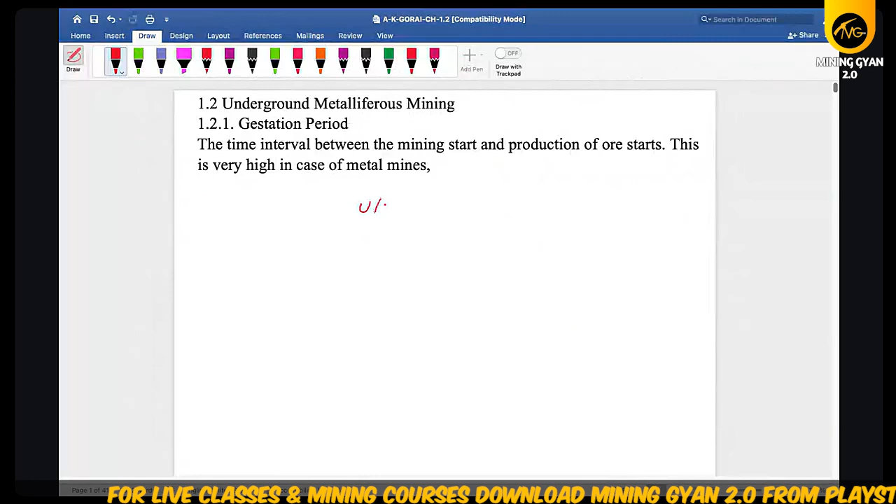Today we will start chapter 1.1, 1.2. We have seen the UG coal mines, and today we will start metal UG. I have decided to give you basic information of the method because maybe you have not read metal thoroughly.

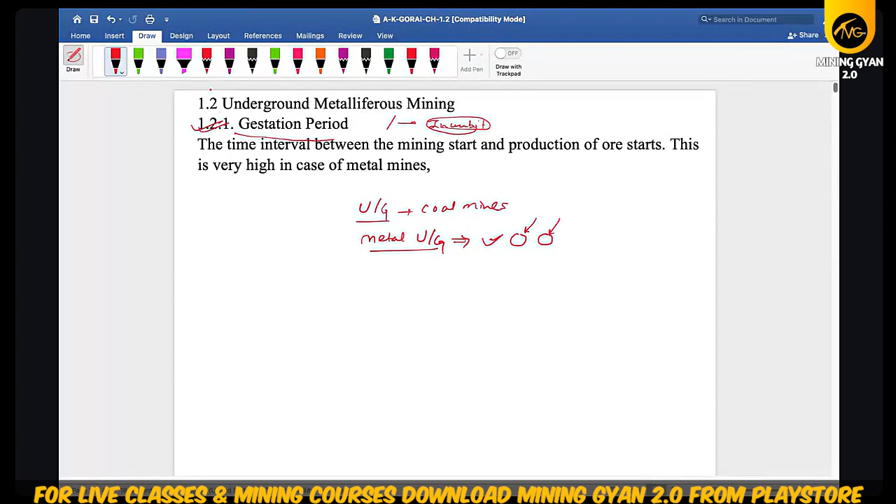Let's start. So the first terminology is gestation period. In the coal mines we have seen incubation period; here we will see gestation period. What is the gestation period? Gestation period means the interval between the mine starting and the production of the ore starting.

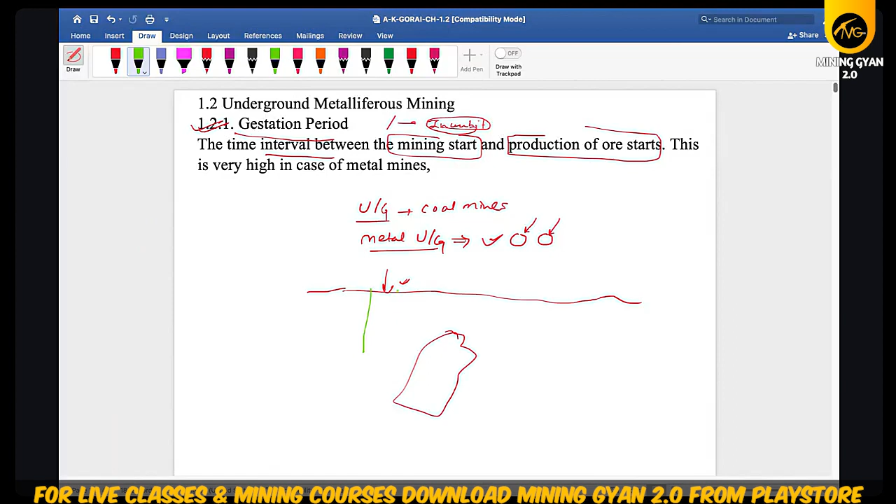What does it mean? Suppose this is the surface and this is your ore. On the first day when you start your mining, you will not get ore because you have to make the shaft, levels, cross cuts, and many other things. Then one day will come, after 2 months, 1 year, 2 years, or 5 years, when the ore production will start and you will reach the ore. So this gap is known as the gestation period.

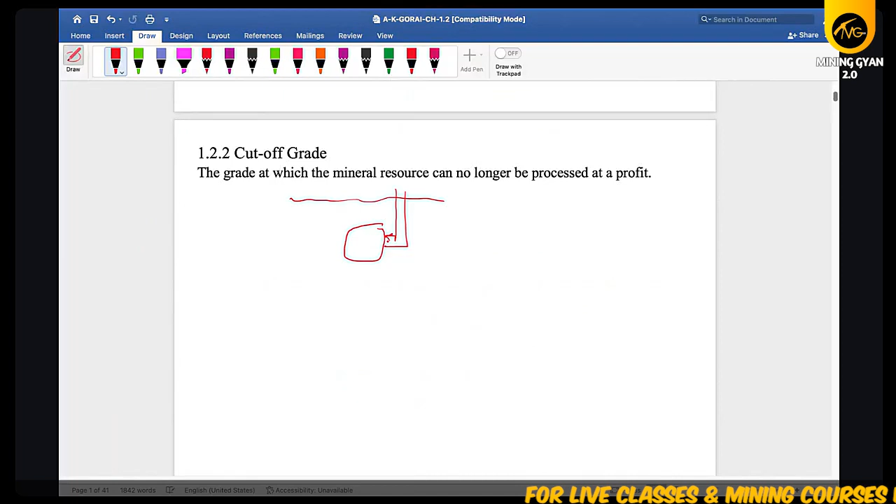Cutoff grade: cutoff grade means the grade at which the mineral resources can no longer be processed at a profit. That means if you want to extract this ore, it should be economical — the grade at which the mineral resources can no longer be processed at a profit. If profit is not happening or is almost finished at that grade, we call it the cutoff grade.

Break-even cutoff grade. The break-even cutoff grade is defined as the grade for which the net value is zero.

Now let's come to the terminology with a figure, so I will give you the hint and explain it thoroughly. In this figure, this is your shaft, this is your incline. Suppose this is the outcrop of your ore, and this is your surface.

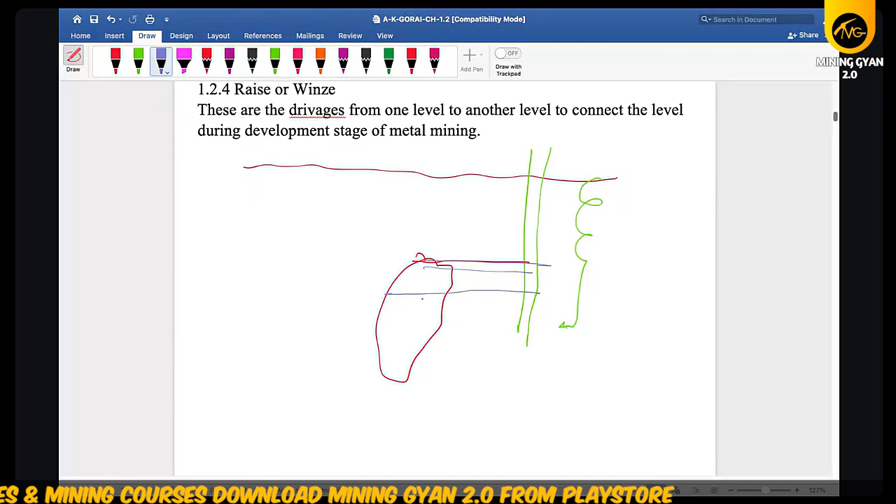So to excavate this ore, we have to make a shaft or incline, whatever method they are using. From this shaft you have to create levels, and this is your cross cut. This is your shaft.

Let me change the color. The strata above the ore body, resting on top of the ore body, is known as the hanging wall. The strata on which the ore body is resting is known as the footwall. So if the ore body has strata above it, that is the hanging wall, and the strata below the ore body is the footwall.

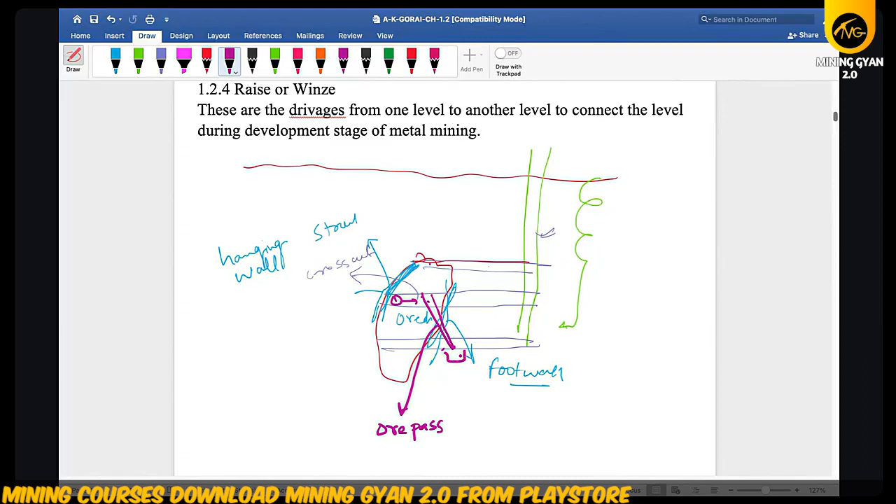Suppose you want to connect this cross cut — if you extract ore from here and put it down, then this connecting passage is known as the ore pass. So here an ore bin will be made which will connect to your shaft.

Till now we know this, and we will divide our ore body into stopes. Suppose this is your one stope.

If you go from down to top, it is known as a raise, and if you go from top to down, it is known as a winze. So the raise and winze are the drivages from one level to another level, connecting the levels during the development stage of the metal mine. Raise means down to top, and winze means top to down.

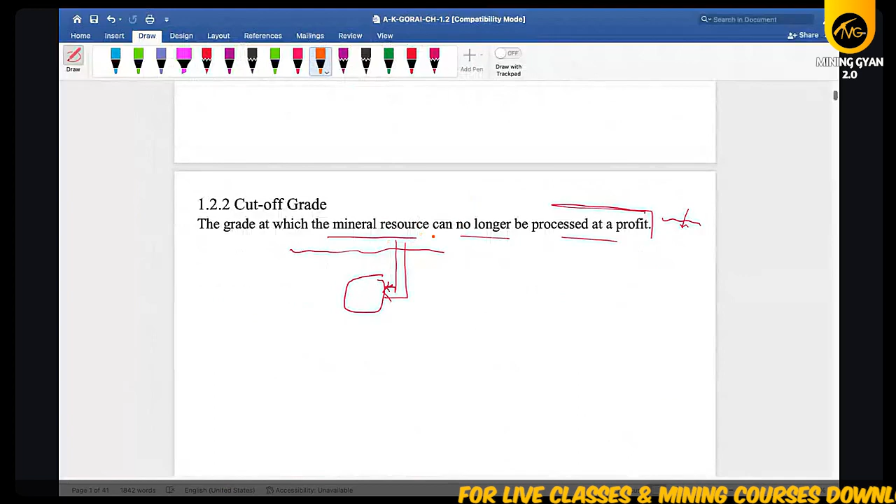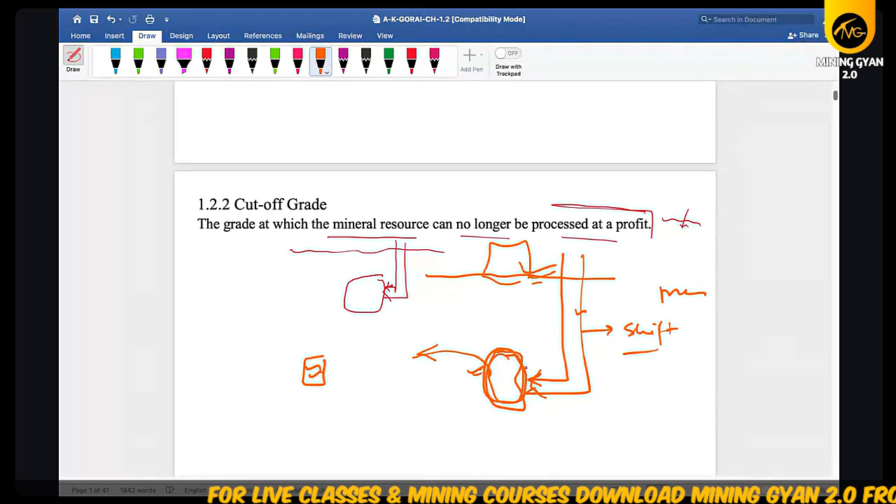The grade at which the mineral resources can no longer be processed at profit. Suppose this is your mineral, so when you extract it, a lot of cost will be involved in it, such as shaft making - you will need money for the shaft, manpower, and many infrastructure facilities you have to create. So if that cost and the value of the ore which you have extracted are nearly equal, then it is the cut-off grade - meaning you are not profitable, but it is equal, then it is the cut-off grade.

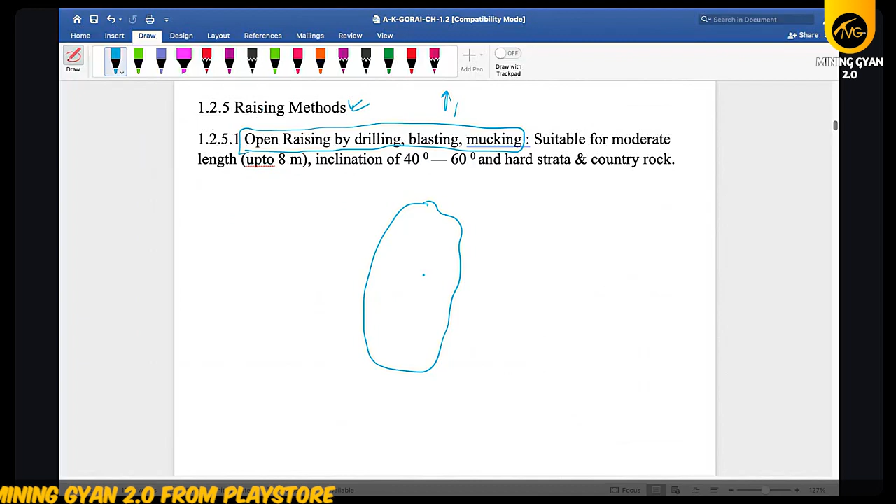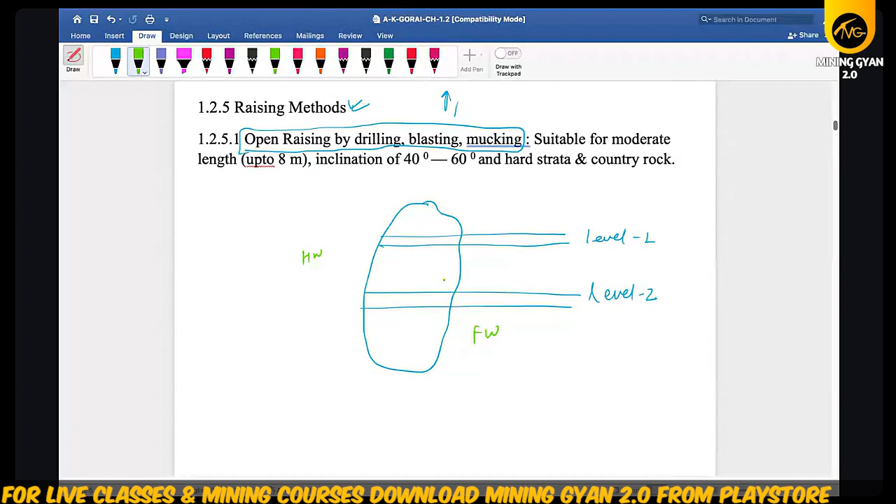So in the raising method, suppose this is your ore, okay, and this is your level 1, and this is your level 2. Okay, so this is your hanging wall and this is your foot wall. So in this method you will create - first we have to see applicability, meaning where it is used, then we will discuss the method.

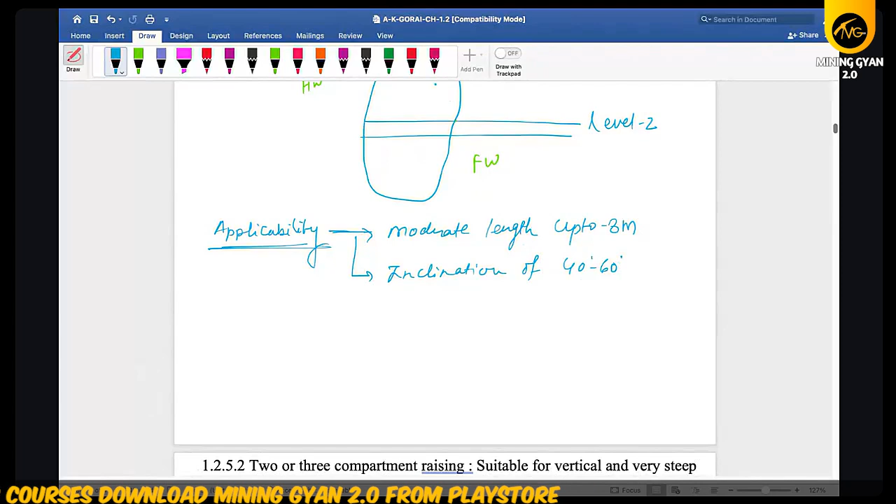Applicability - where we will use it. First, the ore should be of moderate length, up to 8 meters. Second point is inclination of the ore body should be 40 to 60 degrees, slightly inclined. And third point, hard strata - the strata should be hard. So this is the applicability of it.

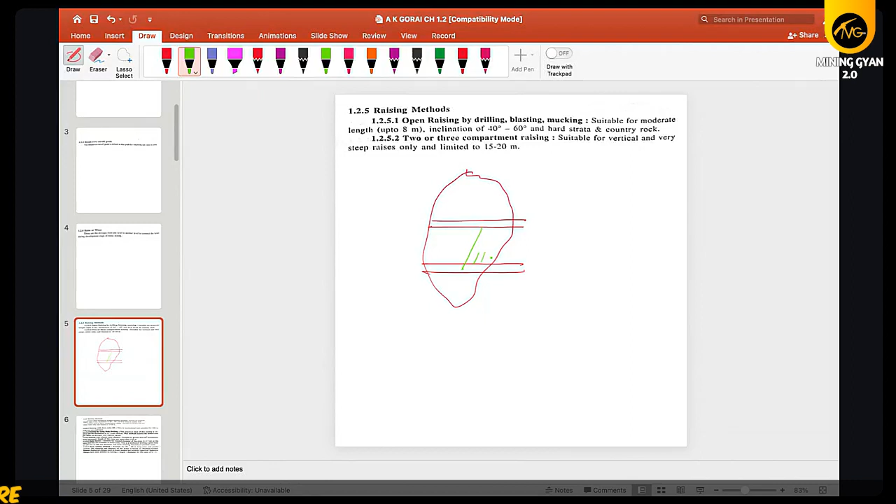So in this method what we will do - suppose we want to excavate it, so we will drill 1, 2, 3, 4, okay, and we will blast it. We will blast up to this point, so this will blast and the ore will fall down. We will collect this material from here. Then we will drill, make a compartment, or extend - where is the eraser gone. So where we were, we will hole and this material will be pulled down, so we will collect it. Again we will make a platform and drill this one and blast and collect. This method is known as open raising by drilling, blasting and mucking.

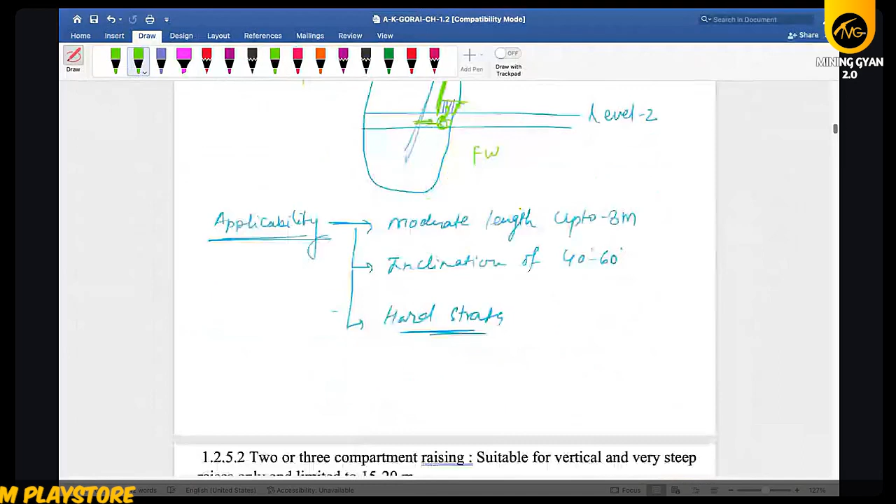So in this method, what type of problems will we face? What is the disadvantage of this method? Because in this method, the disadvantage - first, lack of ventilation. Why? Because we are drilling from bottom to top, so in this area the ventilation was not equipped - ventilation is not up to the mark.

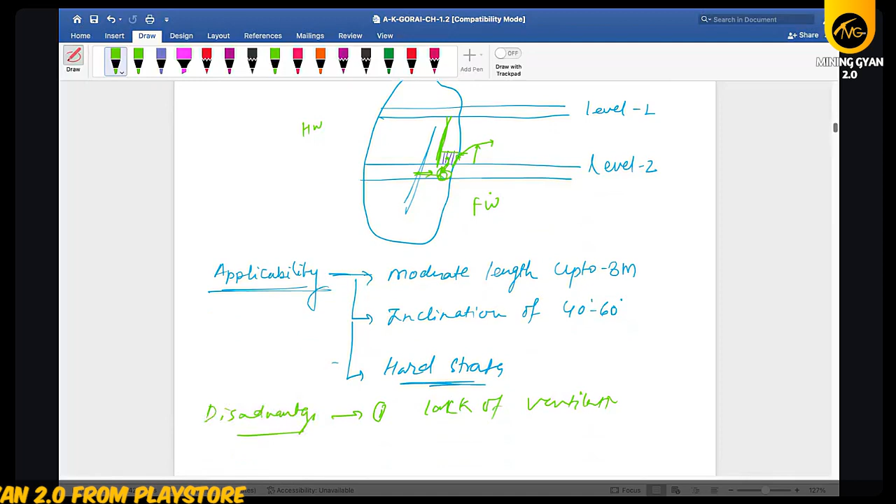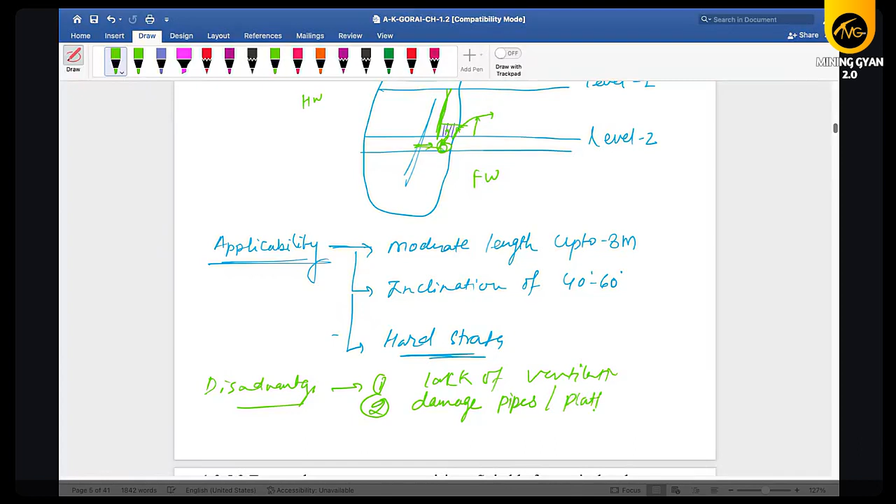Second point, whenever you drill this area and it falls down, whenever this ore falls down, it will blast or create damage to your pipes and platforms. And the third point of disadvantage - should I write or will you write yourself? So second point is damage to pipes and platforms during the blasting. Third point, when the raise goes higher, as we reach very much higher up,

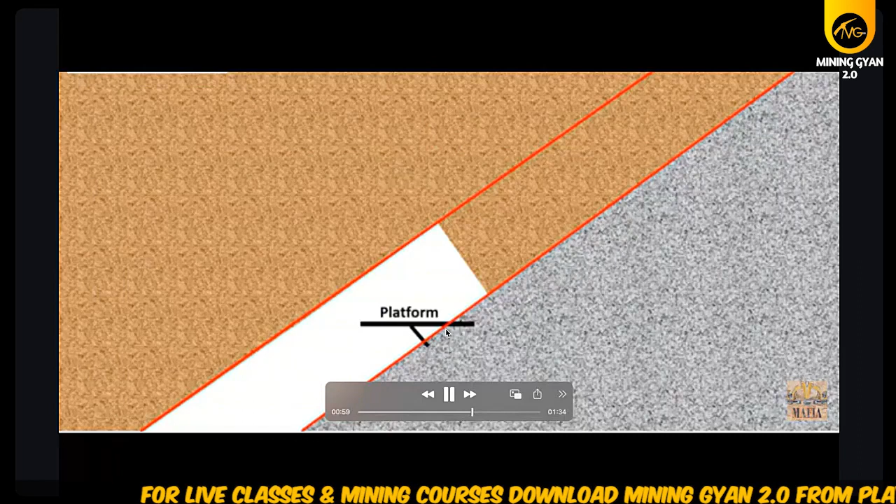Then use drilling and then we will blast. So whenever any person is there, he will face the issue that air is not adequate or ventilation is not proper, and when the blasting occurs, this ladder will damage and the platform may also be damaged. Okay, this method we know as this.

Now come to the second method: divide into 2 or 3 compartment raising, suitable for certain conditions. He has only mentioned 1 or 2 points, so I will discuss in detail. First we will see applicability.

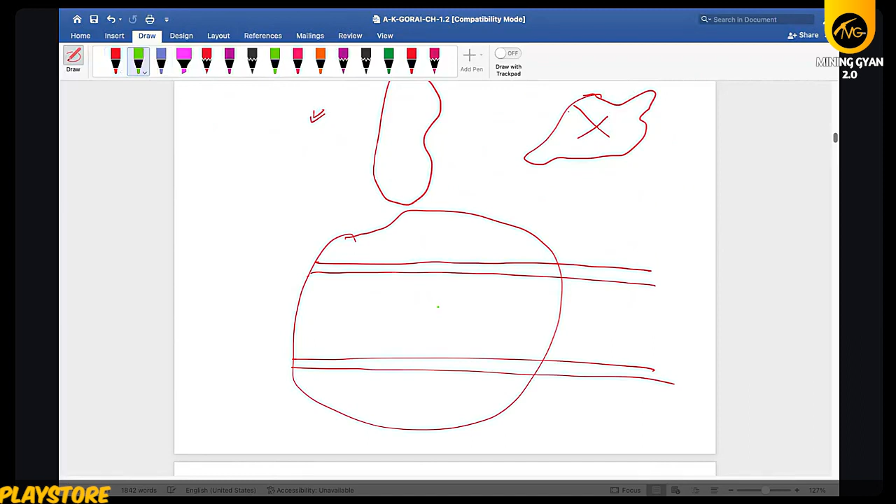So what we will do in this method? Suppose this is your ore body, okay, and this is your levels, and you want to excavate this stope. Then you will first do preparatory work. After the preparatory work, you will drill and blast, and then divide into two compartments: first is for ore, second is where you will make a ladder.

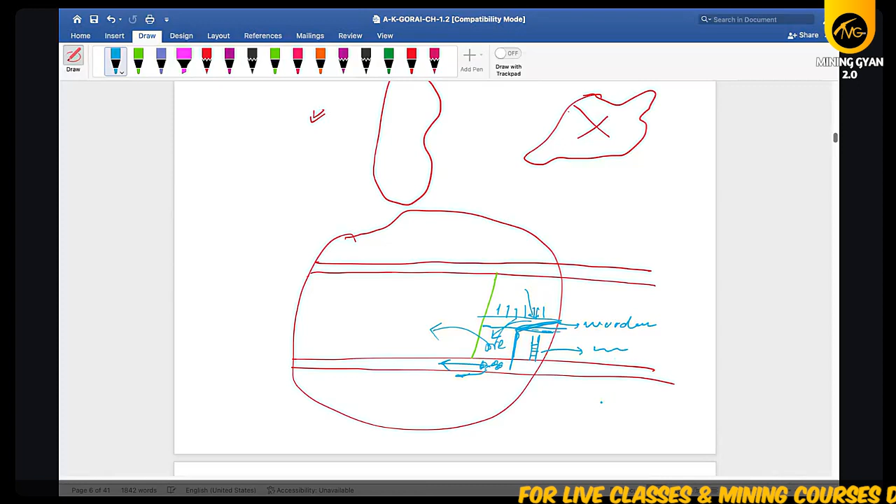So whenever you go up, you will drill and then blast. When you blast, put a wooden block or any material, so the ore will fall down in this area, and you can muck and excavate your ore from this side. So in this method we divide into compartments, one specially for ore and other for preparatory work, because in the previous method we saw that our ladder and platform would damage. In this method that will not damage. So whenever we blast, we can take out our platform.

So I will show you a video.

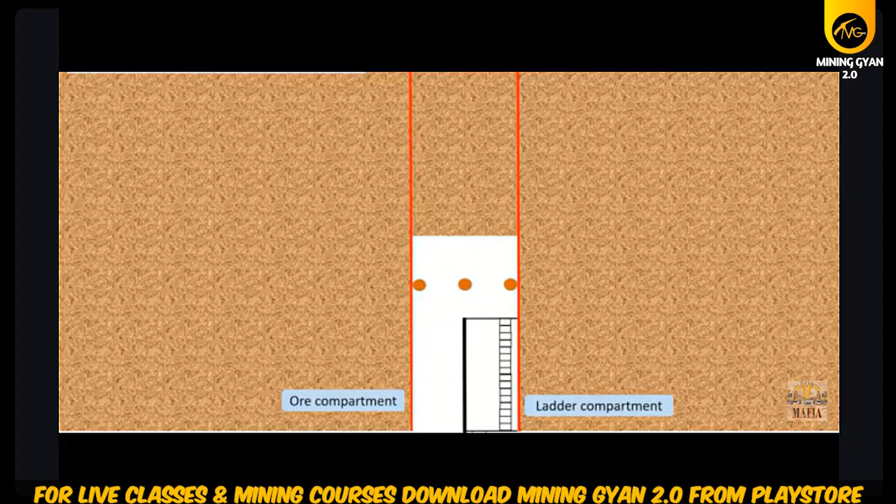So we have done the preparatory work, and now we have divided it into two compartments. One is the ore compartment and second is the ladder compartment. This is wooden, so you can put your platform on it. This is your ladder. So in this working platform, anybody can stay. This is the 3D view. So you will drill the hole. When you want to blast it, you will take back your platform, and put this inclined wooden bar, so it will not fall down on your ladder. It will fall down in your ore compartment and not in your ladder compartment. Okay, this method is known as the two compartment method.

Come back. So we have done two methods: first is raising method with drilling, blasting and mucking, and second method we have discussed, two compartment method.

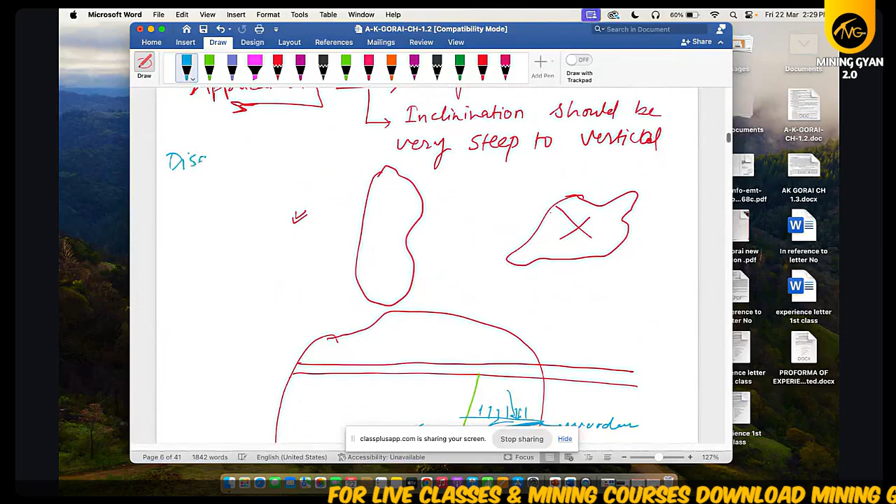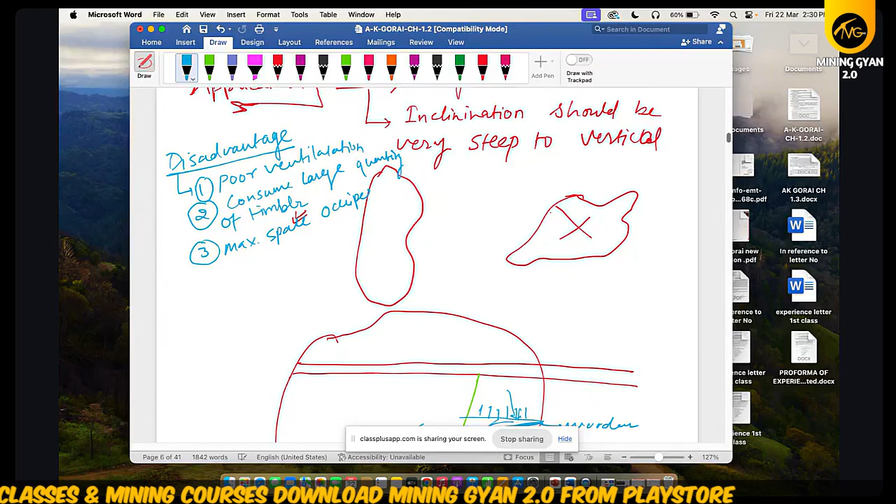So this method has also some disadvantages. What type of disadvantages does this method have? First disadvantage is, in this method also, poor ventilation. Second disadvantage is it consumes a large quantity of timber, because we are using platform and ladders. So this method consumes a large quantity of timber, and maximum space is occupied by compartments.

Okay, please write down. So we have discussed two methods. Come to the next method: raising with Jora raise lift.

In this method, now this method is a mechanized method. Second point is it is suitable for 100 meters long.

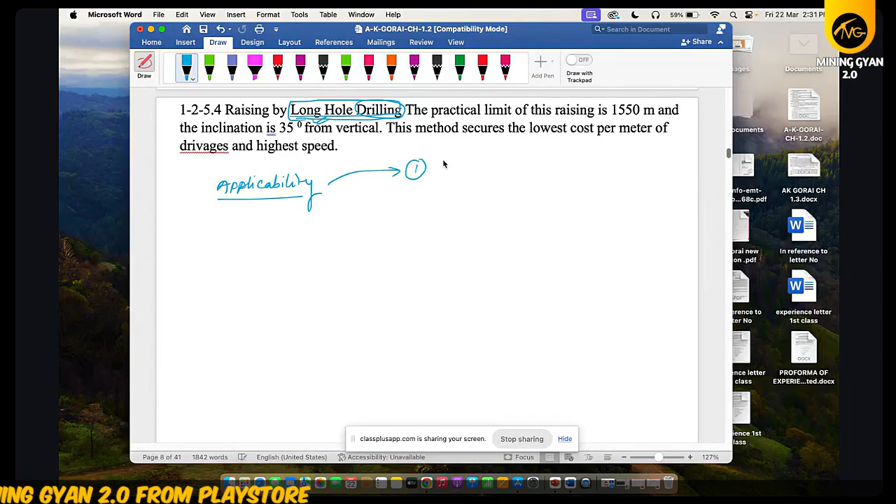First point of applicability: length should be 15 to 50 meters. Second point, inclination should be 35 degrees from vertical.

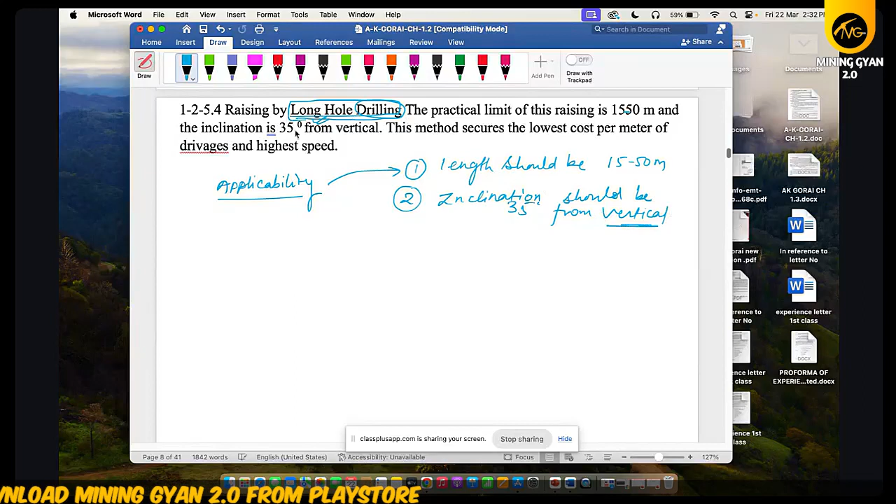These methods secure the lowest cost per meter of drivage and the highest speed. If these types of lines come, you should remember this, because these type of lines may come in your options. So when this type of option comes, you should know this is for long hole drilling, securing lowest cost per meter and highest speed.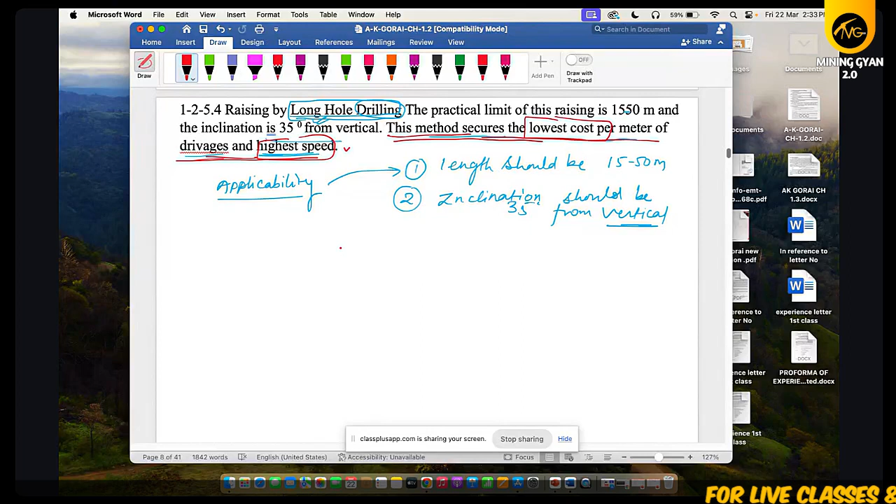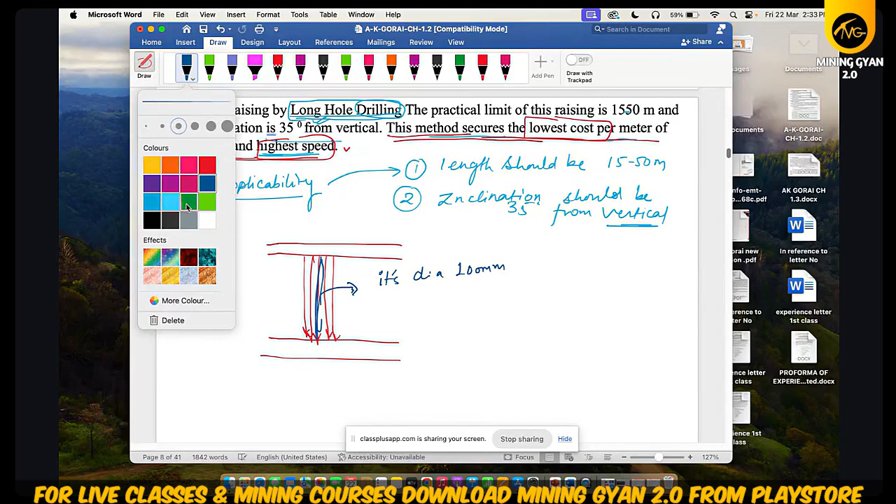What we will do in this method? First, we will have two levels. From the top level, you will drill long holes from one level to another. When you drill, this middle hole will be the big one, because its diameter should be 100 mm, and the other side holes' diameter may be less, nearly 50 to 70 mm. So the middle hole's diameter will be large. Why the middle hole? The middle hole will provide us the free face.

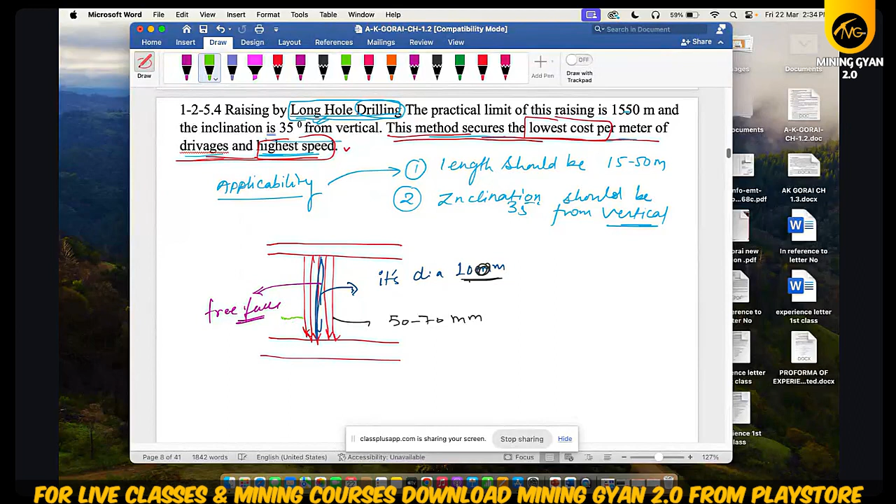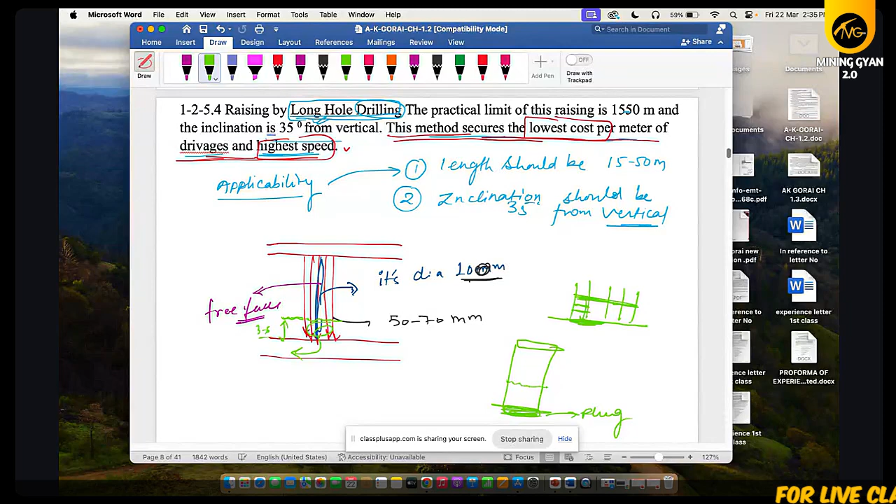So we will put some explosive up to, suppose, 3 to 6 meters, and blast. This material will collect. Again, suppose this is your hole. You use a plug so your explosive will not fall down, then explosive, then stemming, then plug. Suppose that is your hole, open on top and bottom. You use plug so the hole will be closed. Then you put some explosive, then stemming, then also a plug, and then you will blast.

I think you have got enough information, and if I have a video I will show you long hole drilling. Yes, I have.

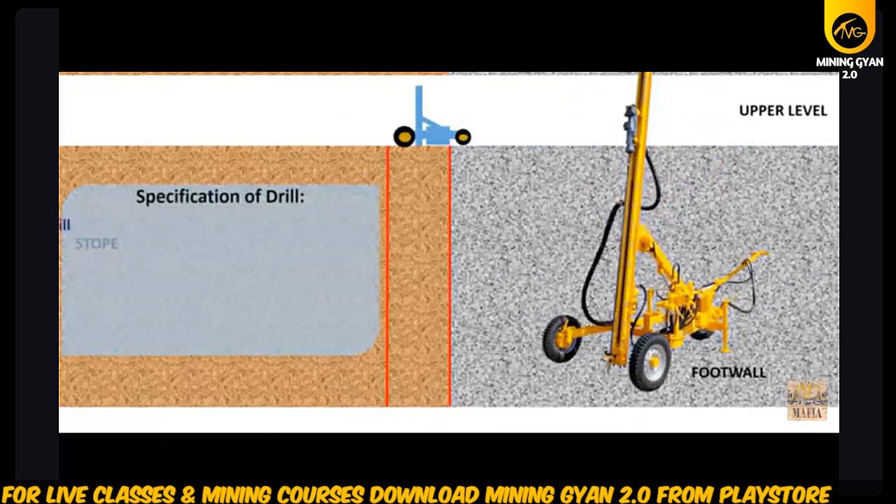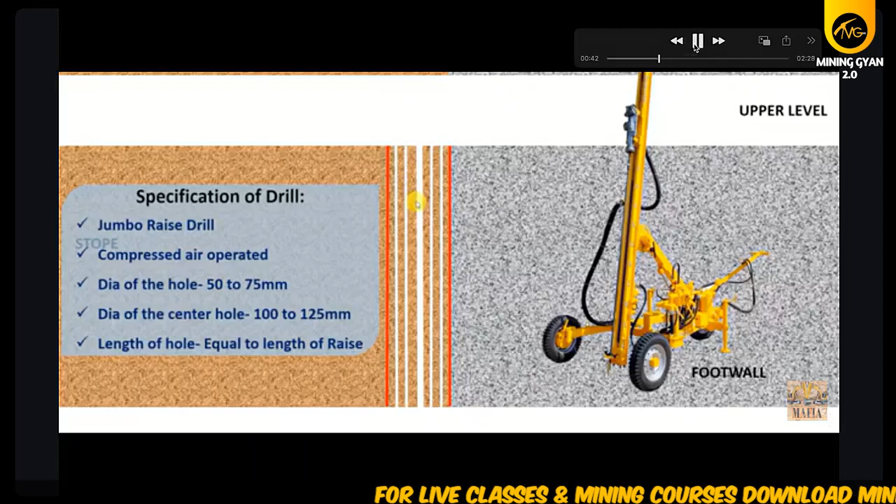So we have drilled, and the middle hole should be larger than the side holes. We can use a square or rectangle pattern, it's up to you in which type you want to blast.

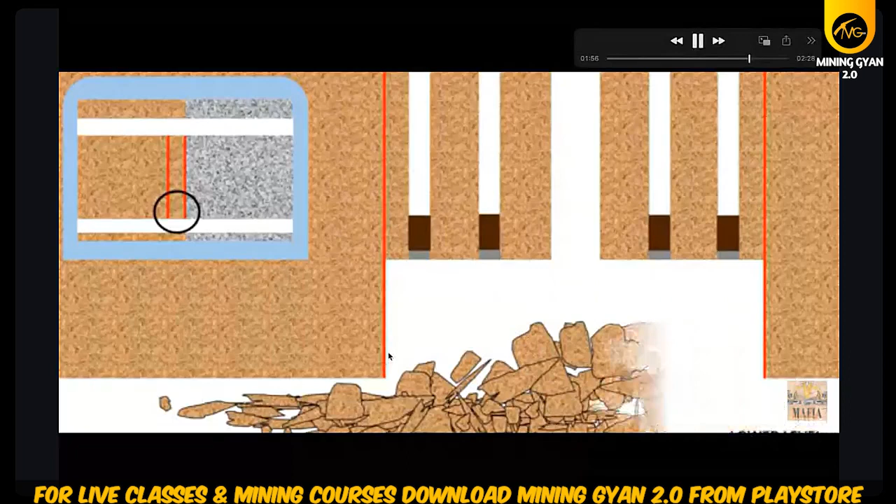We will start from the bottom. Say this is your central hole, which is larger than the side holes. You use plug so this hole will be closed and your explosive will not fall down. This is your explosive, you put some explosive, then you use stemming so your explosive will pack, then again we use plug, then we will blast and collect this material. Again we adopt a similar process and blast.

The range of 3 to 6 meters depends on various factors.

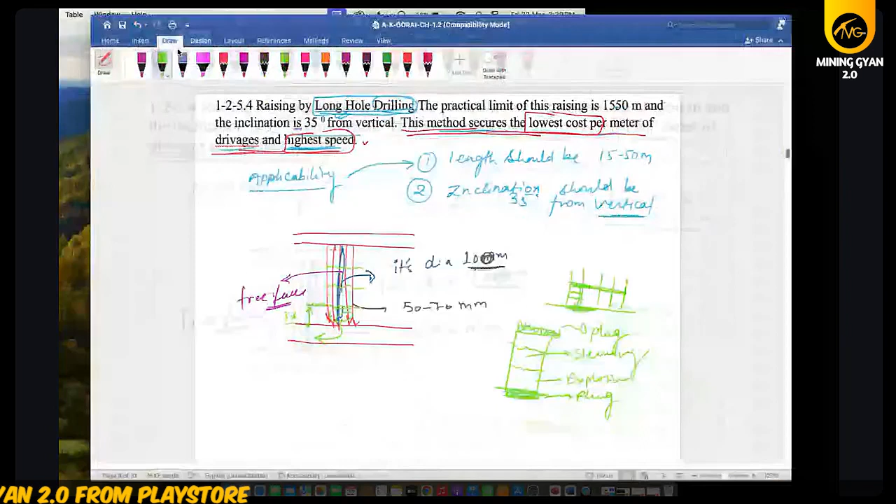Now we have discussed four methods. First was the drilling method, with drilling, blasting, and mucking. Second, we read about the two compartment or three compartment method. Third, we watched the Jora raising lift, which is not in use now. Fourth was the long hole drill method. Coming next, raising with Alimak raise climber.

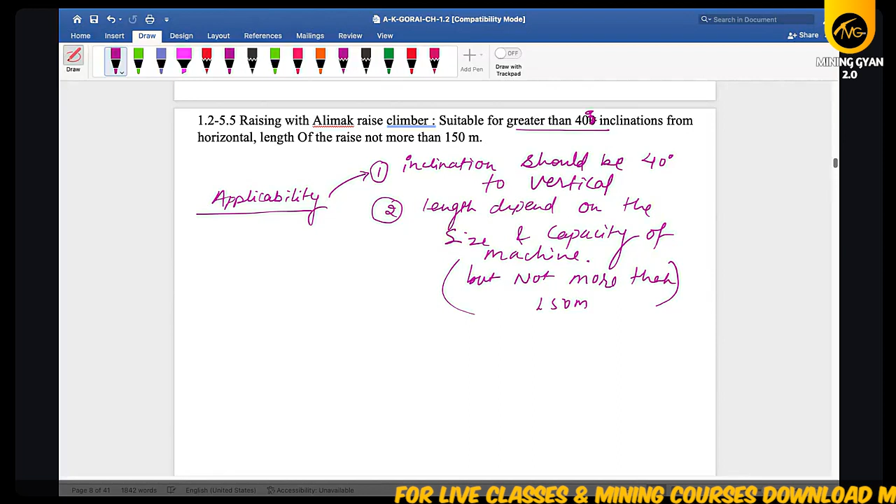First we will see applicability. The inclination should be 40 degrees to vertical. Second point, length depends on the size and capacity of the machine, but not more than 150 meters. Suitable for greater than 40 degrees inclination from horizontal or vertical, and the length of the raise not more than 150 meters. 40 to 50, you can take that, it depends on various methods.

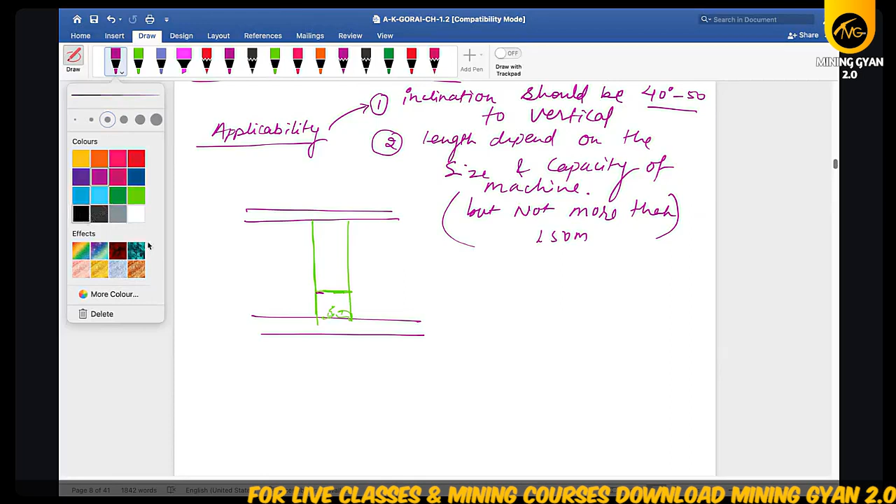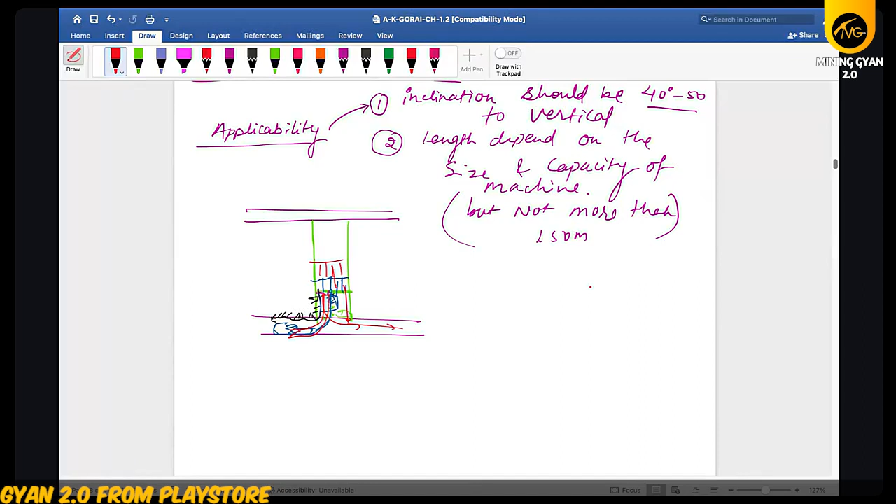What will we do in this method? Suppose this is your level 1, this is your level 2. Suppose we want to excavate using long holes, we have drilled the long holes, but in this method we will do some preparatory work. Suppose we have done this preparatory work, this space is void, now this place is empty. So we use a ladder and fix it. Then the Alimak machine, we will put the Alimak machine on it, so it will go up, and on this machine a person will stand and drill holes. When we want to blast, this machine comes back here, you blast, this material falls down, you collect this material, again this machine goes up, you drill, blast, during the blast the machine comes back, you collect the material. This is the process. So this is your Alimak raising method.

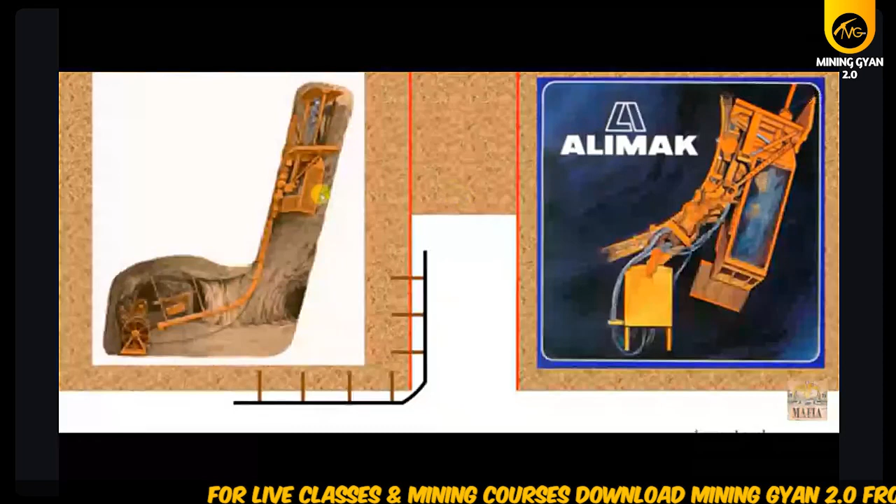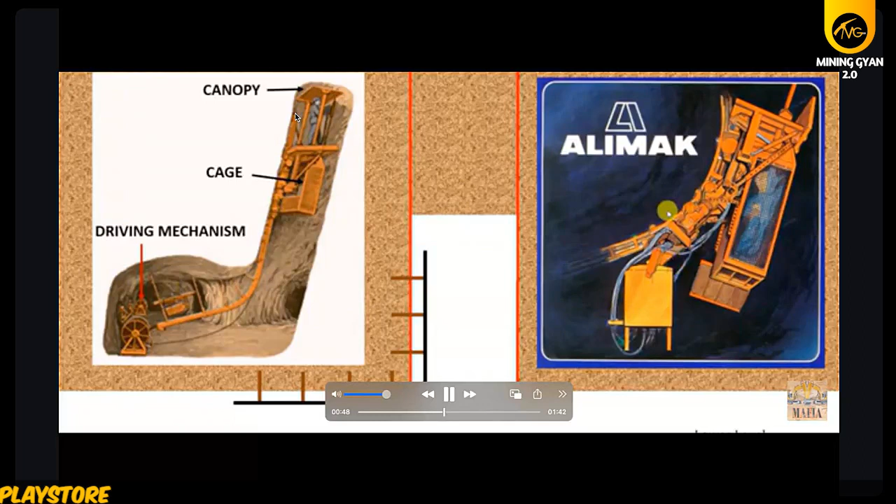So preparatory work we have done, then we will put track with the help of rock bolts, and this is your Alimak machine. This is your canopy, this is your cage, and this is your driving mechanism, so it will help your canopy or cage to run. This machine will run on the track, and this machine will help.

This machine go up, and this platform will be extended, and you drill the holes. When our drilling process is complete, this machine comes back to this position, and you blast and collect this material, and extend. If you want to extend your track, you can extend. So this machine goes up, okay. This is your Alimak method.

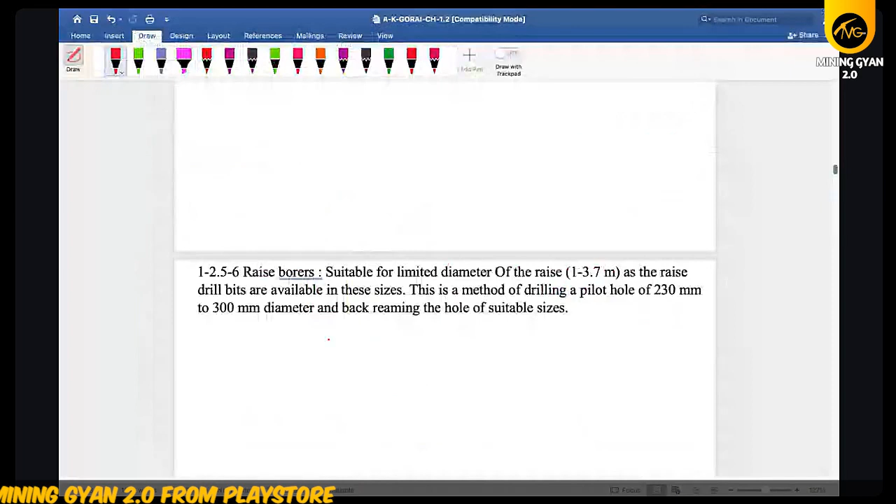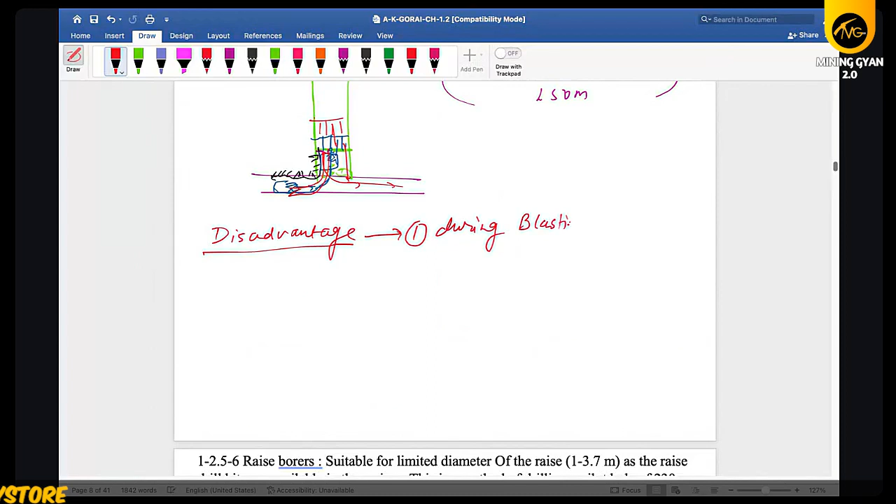Now come to raise borers. First, we have to discuss the disadvantages of the Alimak method. First disadvantage of this method is when you blast, during the blasting, your track will be damaged.

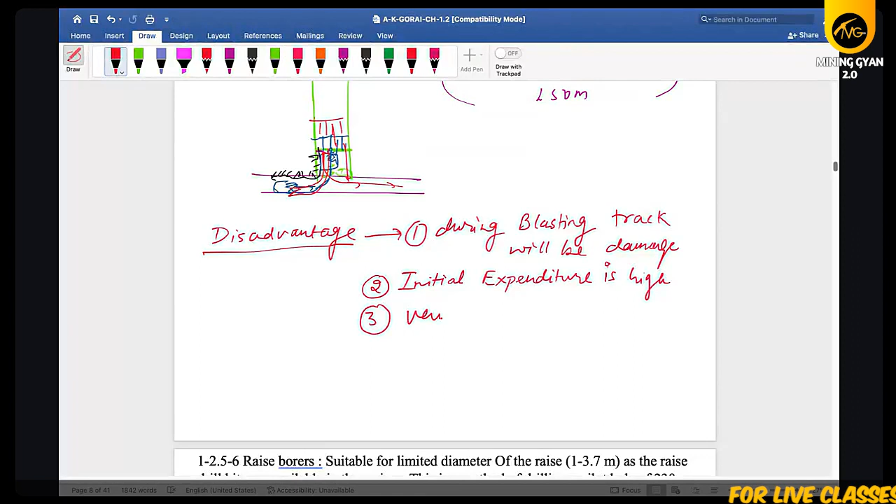Second point, because this is a machine, the initial cost is very high. So initial expenditure is high. Third, in this method also ventilation is poor.

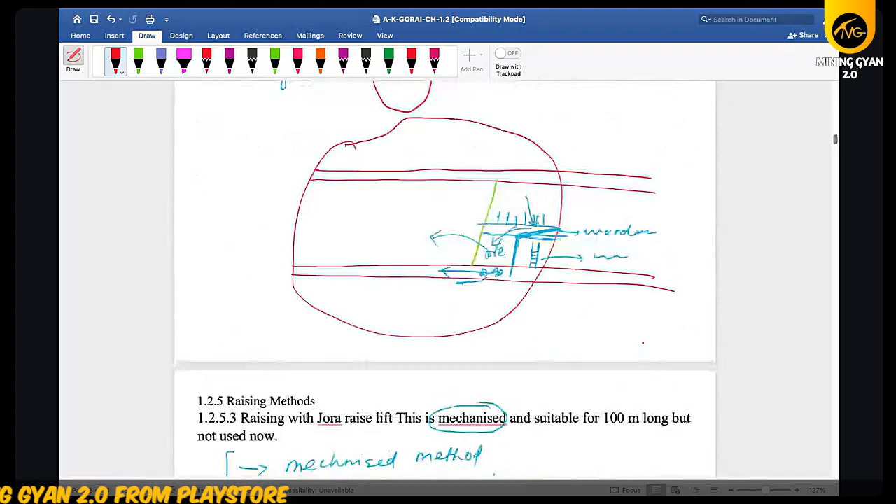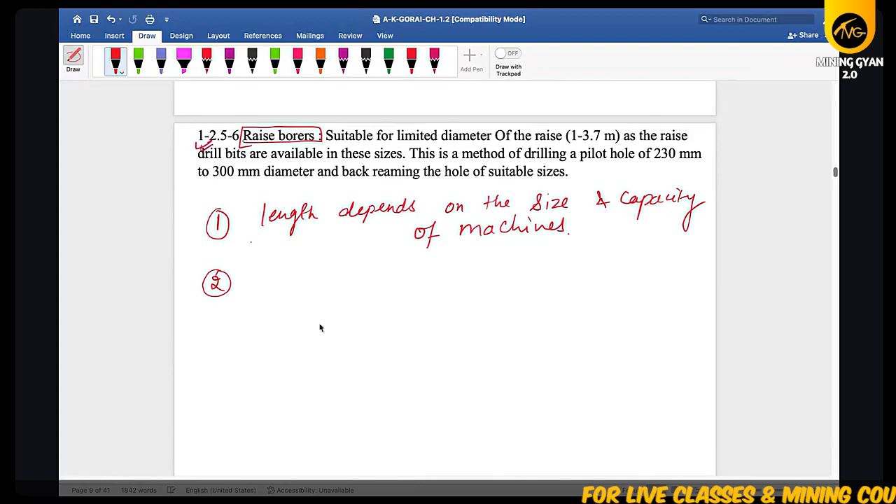Raise borer. So in this raise borer, first applicability or some information. First point is length. Length depends on the size and capacity of the machine, because in this method we are also using the machine, drill machine, so the size and capacity will depend on the machine.

Second, the inclination of the ore body should be very steep, nearly vertical, because we will hold so ore body should be nearly vertical. So what we will do in this method...

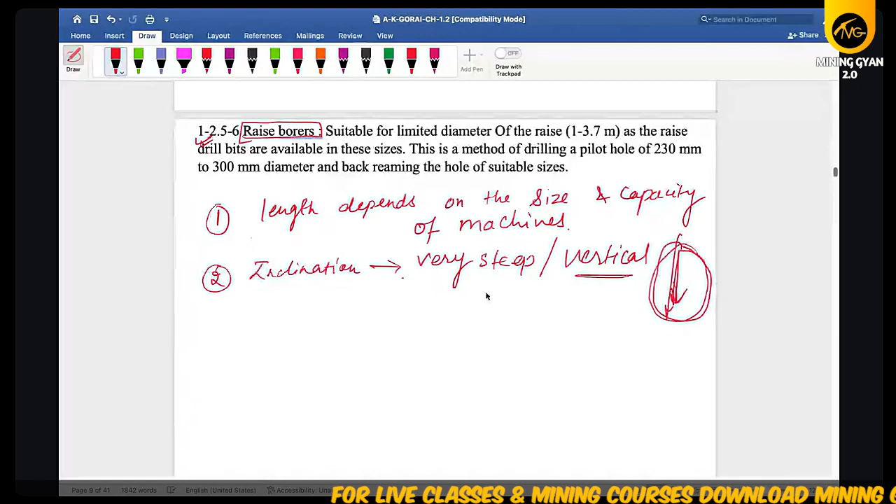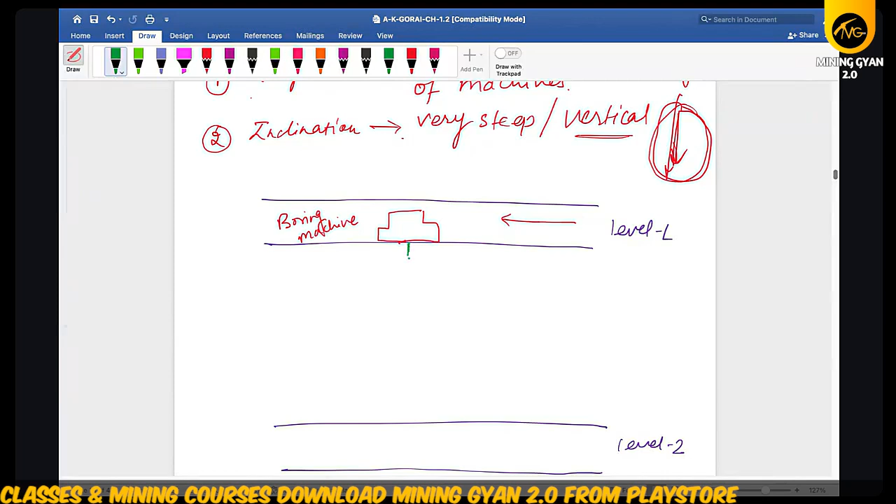Suppose this is your first level, okay, level 1, and this is your second level, level 2. So in this method your drill will go on to here. Okay, this is your boring machine. First you will drill a hole which diameter will be smaller. This hole is known as a pilot hole.

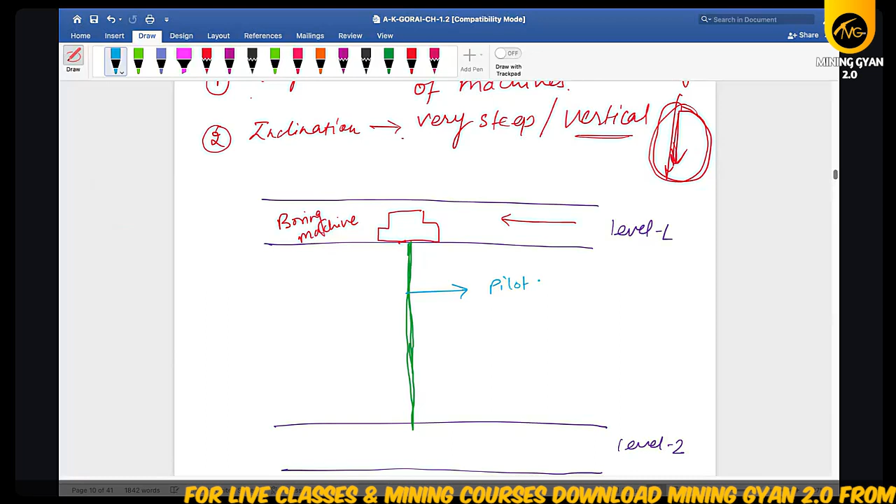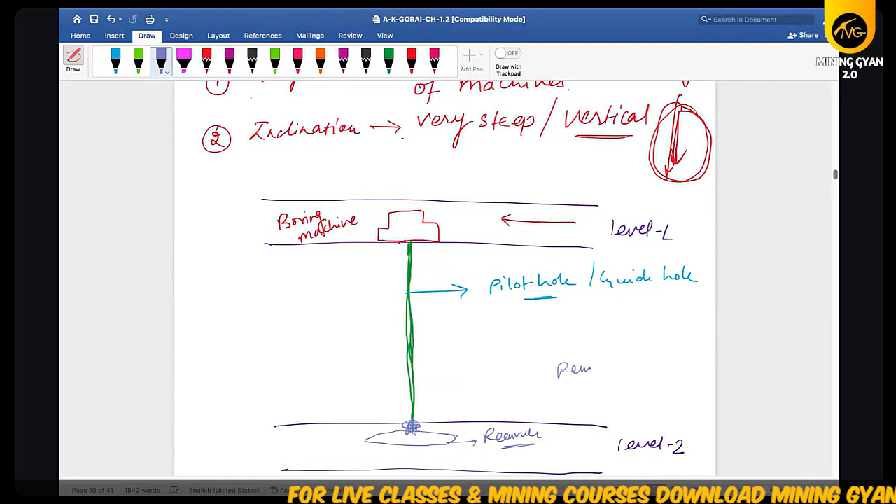We can also call it a guide hole. So we have drilled the guide hole. From the bottom, you place a reamer. You remove the bit of the drill and you put the reamer. So remove the drill bit and put the reamer. So start drilling from bottom to top.

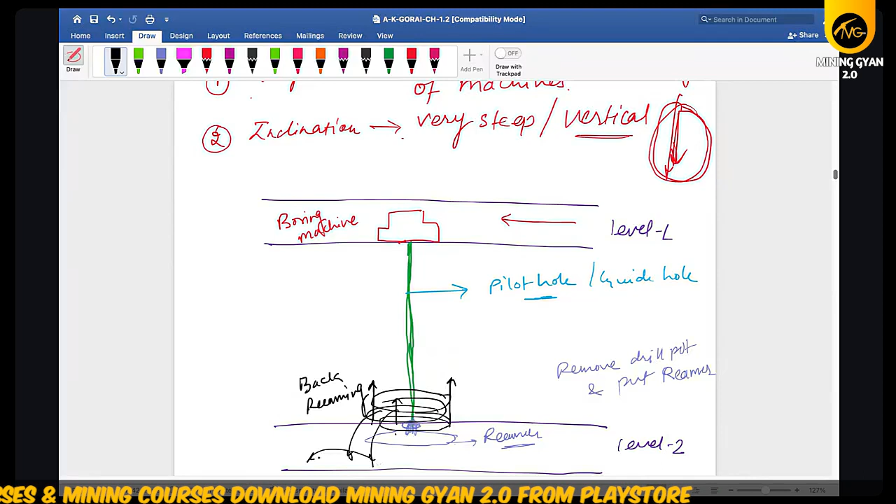And in this method, this is known as back reaming. So when you come back, it will cut down your rock. It will fall down. Collect this material simultaneously. This method is known as raise borer. Understood? Now we will see the video if I have it, otherwise I'll try to explain. This is your raise borer.

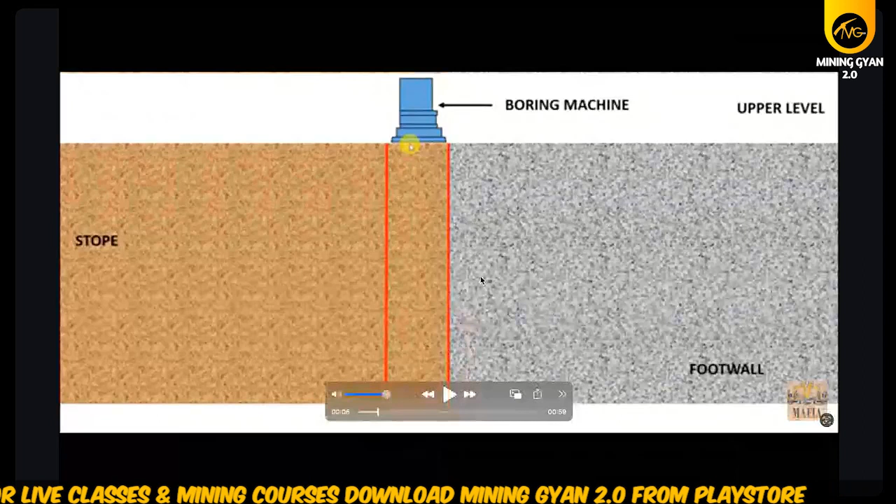So this method is also of two types. Raise borer method is two types: up reaming or down reaming. So in the raise borer, we have drilled the hole with, this black one is your drill rod, and this is your pilot hole. So drill bit cuts down this pilot hole. Then we remove the drill bit and put the reamer, because we are discussing the up reamer.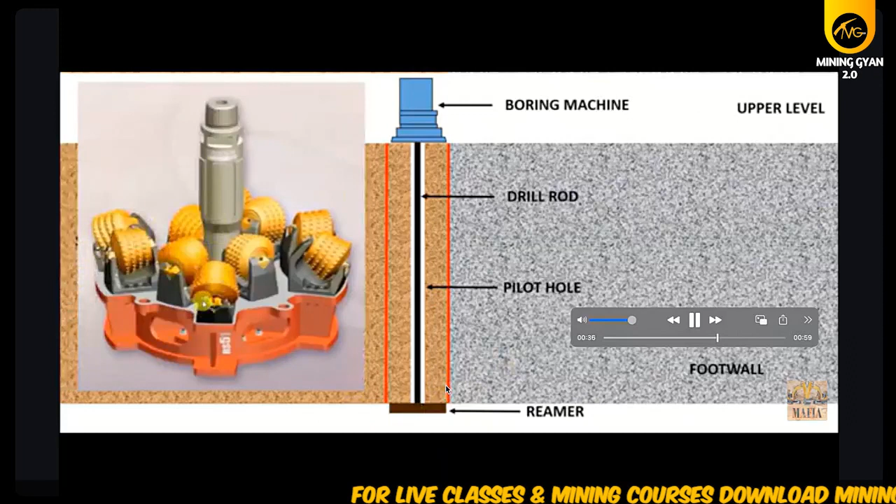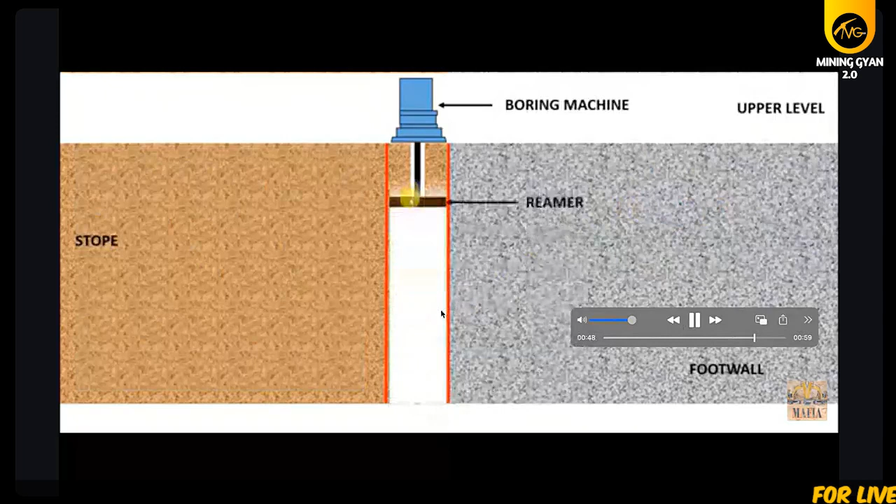This looks like this, this is your reamer. So you have put down your bit, and again you are using the reamer, which diameter is larger than your drill bit. So we are now doing the back reaming, and then we will disassemble our drill. So first we drill the pilot hole, then we do the reaming, and this machine collects your material simultaneously. So in this method, two steps: pilot hole boring, and second is the back reaming. So up reaming method is when we are connecting from down to top.

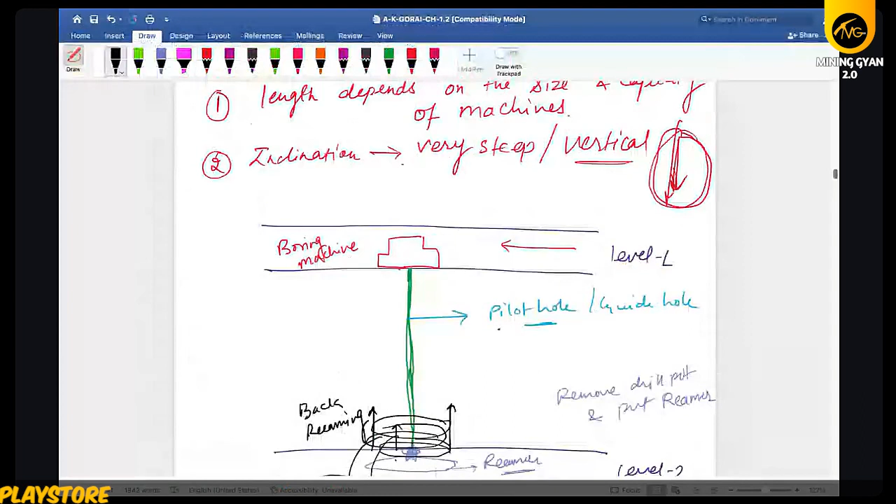So we have discussed the raise borer method. In this method also there are some disadvantages. So we will discuss the disadvantages of this method. First, high initial cost, because this machine needs lots of capital, so high initial cost.

Second point is, whenever we drill the pilot hole, deviation will occur. So deviation happens in the pilot hole, so this is also a disadvantage of this method. In this method, the high power consumption. Okay, and this method wants highly skilled manpower, high manpower requirement.

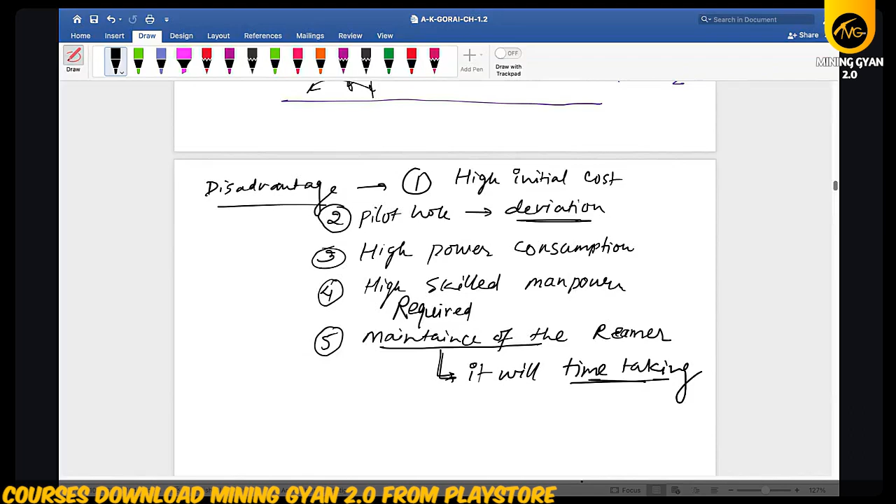And maintenance of the reamer. So whenever we try to do maintenance of the reamer, it will be a time taking process. Okay, now come to the next method, which is the drop raising method. So what is the drop raising method? First we will see the applicability.

First point of applicability: you need a 50 to 60 meter long raise, which should be nearly vertical.

Second point should be charging and blasting. The hole is based on VCR. What is VCR? V means vertical, C means crater, R means retreat. So charging and blasting of the hole is based on VCR.

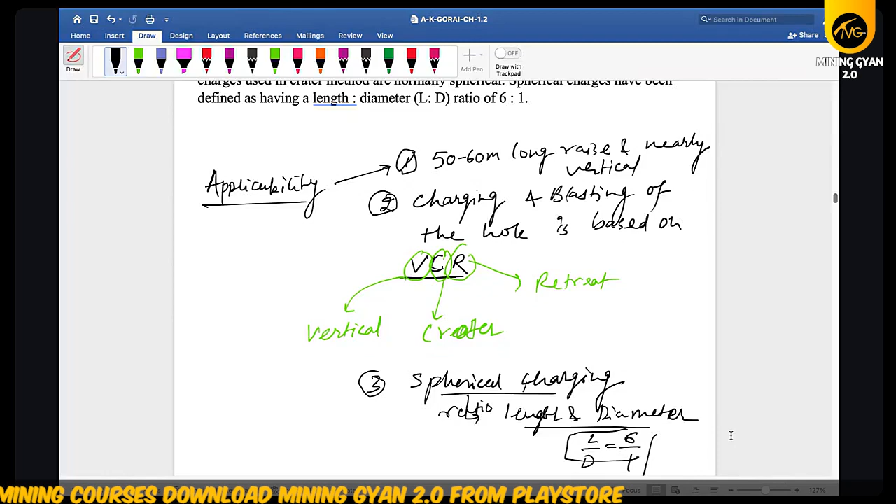Okay, so we have discussed a few methods. Tomorrow I will discuss a few tricks because yesterday I did not have the time, so I skipped. But today I think I should discuss one or two tricks which may help you in the examination, once a paper.

So I told you again and again to mug up and remember the table from 2 to 25, then cubes up to 15, and a few formulas like (a+b) whole square equals a square plus b square plus 2ab. If minus comes, it will be minus.

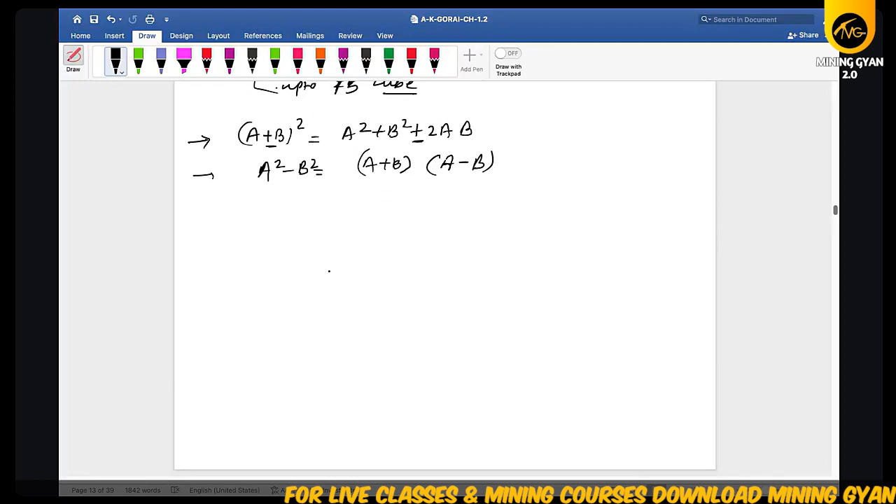a square minus b square equals (a plus b)(a minus b). Okay, I have also discussed the

numerical number system, in which I discussed the divisibility rule of 2, 3, 4, 9, and 8. I told you how to multiply with 11, but how will you know that any number is divisible by 11 or not?

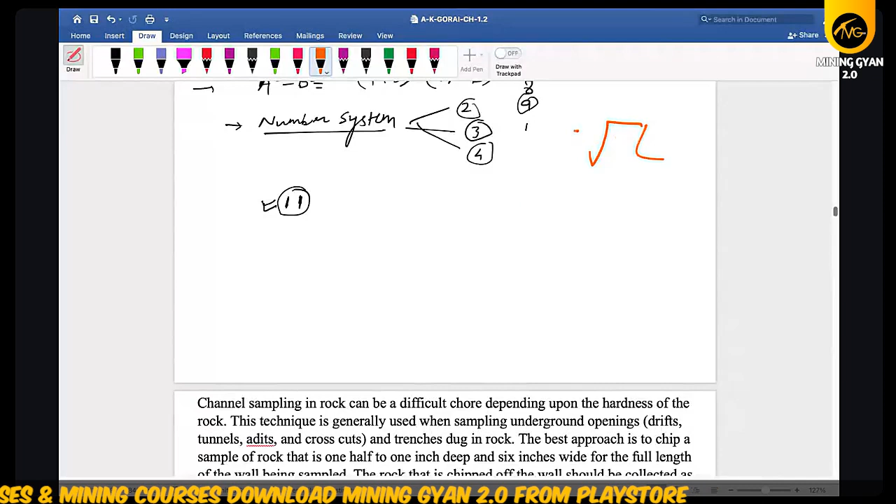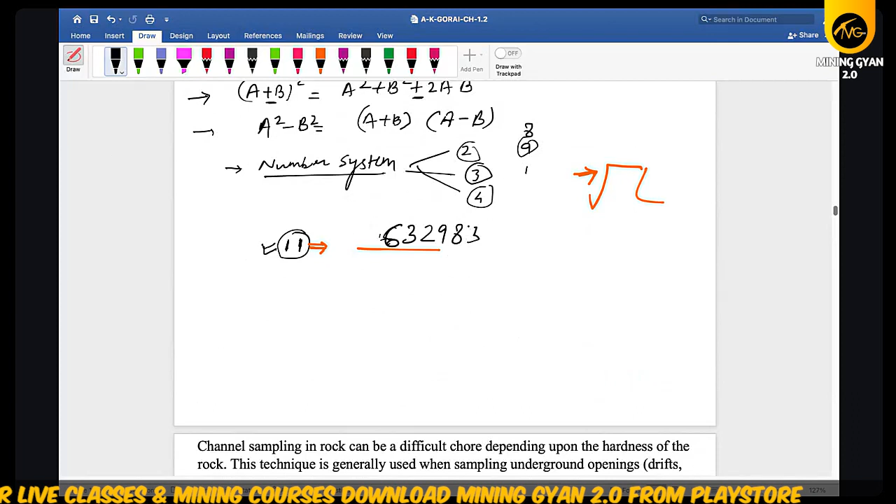So for the divisibility rule, you have to add the digits which are on a certain position - even position or odd position. So add the digits which are on the even position, and add the digits which are on the odd position.

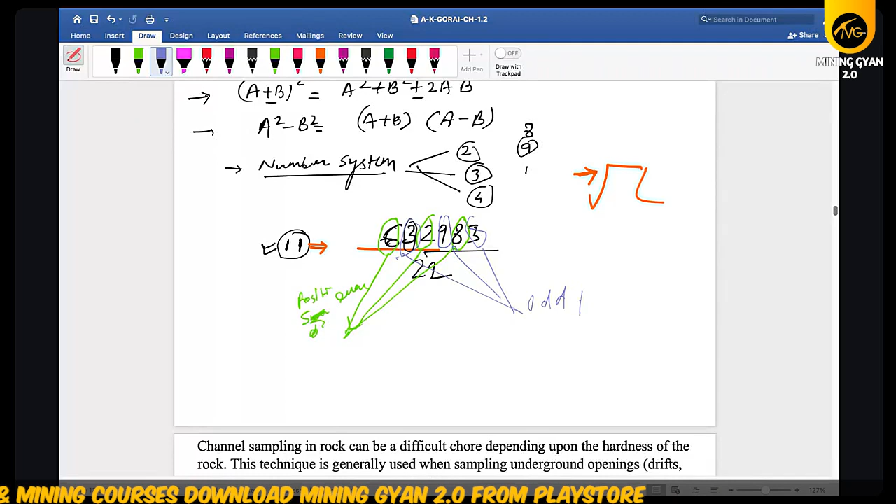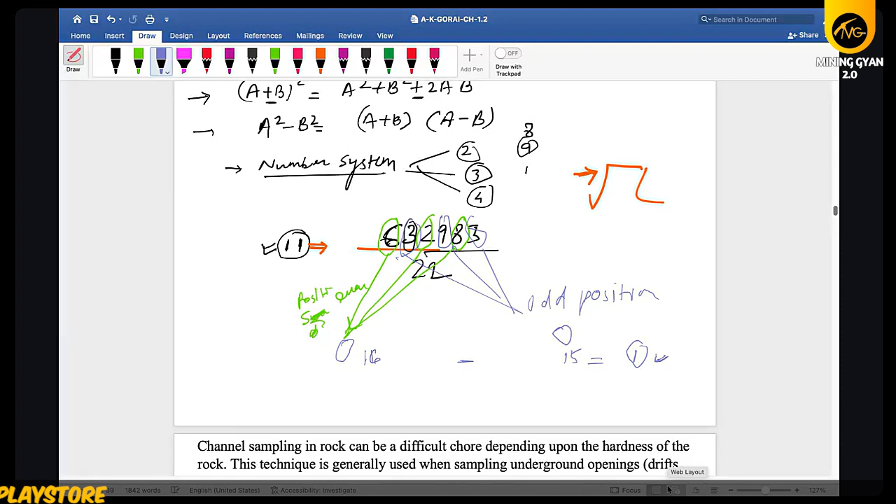Okay, and another trick - I will take your queries after 4 to 5 minutes, please wait. I told you how to square numbers near 100, like 102.

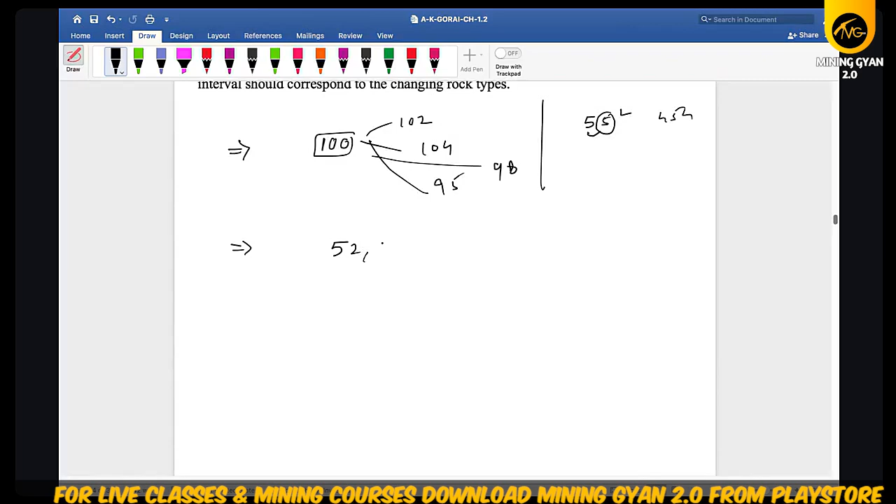I told you about squaring 104, 95, 98. Another trick I told you: if the number's last digit is 5, how you will square it. And another trick is if you want to square 52, 54, which is near to 50, or 48, 49, 47 - how will you square these?

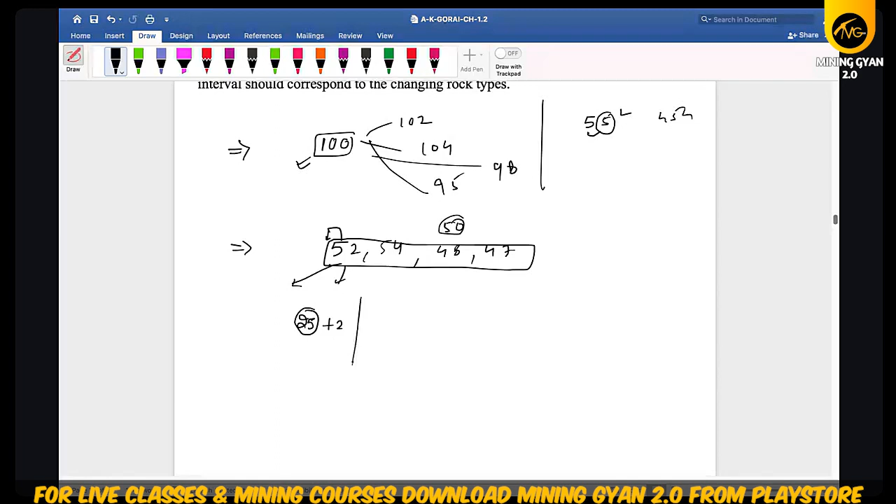For this number square, earlier we took 100 as the base. In this case we will take base as 25. So take 25 as the base. If this number is more than 50, then add 2, put a line and square of 2.

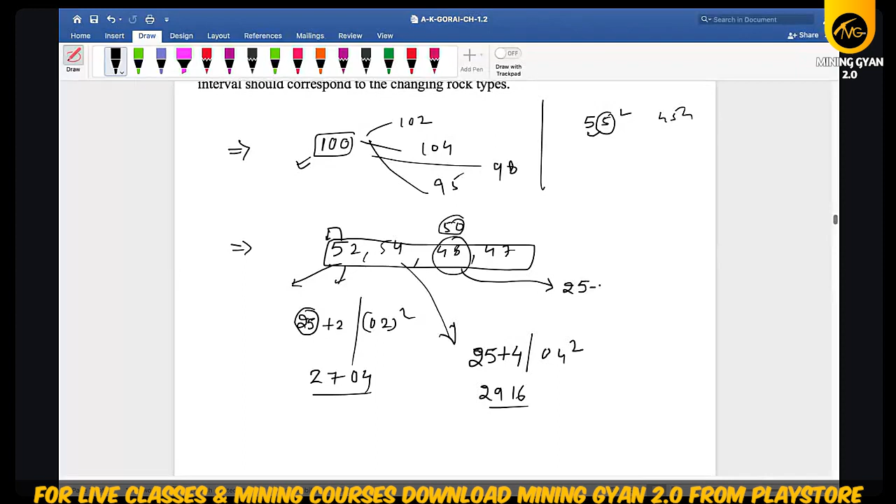If you want to square a number less than 50, how much less? 2. So you will minus 2 from 25, square of 2, so it will be 2304. Similarly, 25 minus 3, square of 03, it will be 2209. Okay.